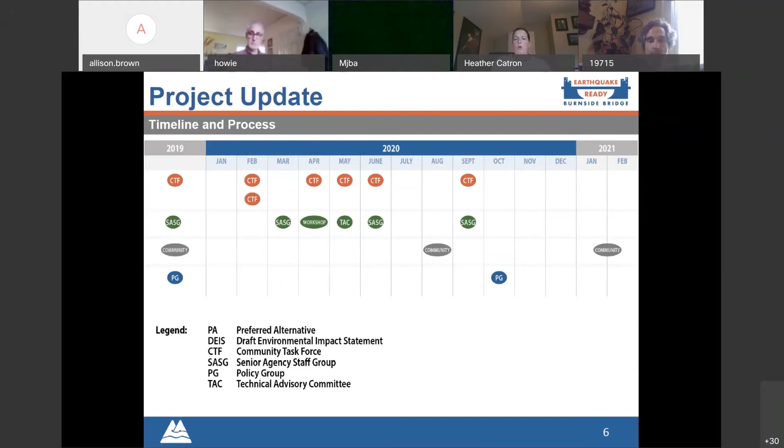I wanted to talk a little bit next about how we're using all of the information you've all been working on so hard over the past year and a half. We're taking the criteria and measures you've developed, plus the value weightings you assigned at your last two meetings.

And then taking those performance ratings that were developed by the technical team and vetted with the agencies, that's how we're actually going to start applying the scoring.

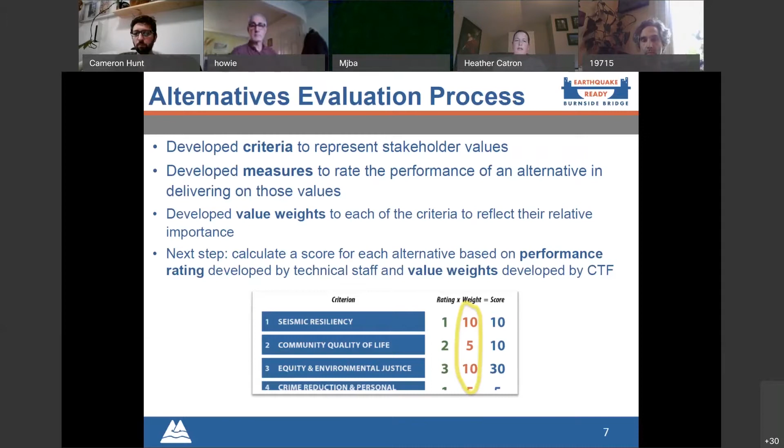Again, when we come back to you next month, that's where you'll start to see how the different alternatives actually scored against the criterion measures you've all identified, to help you make that recommendation around the preferred alternative.

So on the next slide, really what we want to talk about tonight, before we get into the results of the scoring, is highlighting some of the key differentiators. These will help make sense of why some things may be scored higher or lower for the criterion measures you've developed, to help get us through this process of selecting a preferred alternative.

So I'm going to pause there and see if there are any questions before I hand it off to Steve and Jeff, who will be walking through all of these key differentiators for our criteria.

So we're looking for any questions that folks have. Remember, you can raise your hand. Susan, I see your hand is raised, but I'm not sure if you have a question or if that's just left over from earlier.

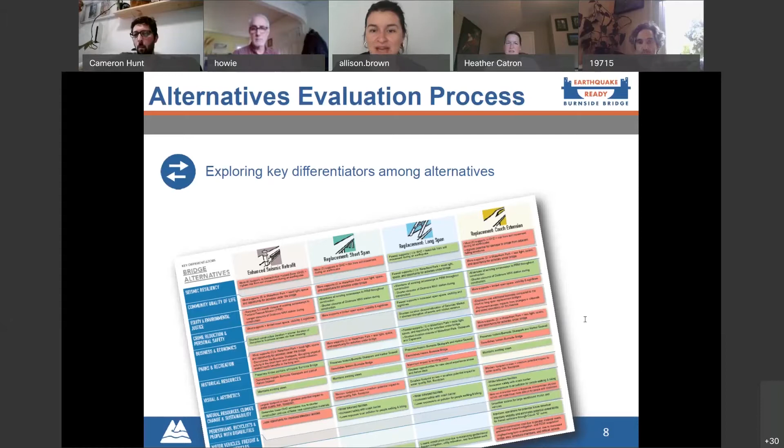Hi folks, so I will be talking about the alternatives, just kind of a reminder about what each of the alternatives are. I think last time we met we had 3, and now we have 4. So I want to talk a little bit about how that came to be.

Starting at the top, we have our enhanced seismic retrofit. As we've been talking about for months, that is the retrofit with a partial replacement, primarily over the freeway and the railroad spans, a whole bunch of deck replacement work, and frankly almost every part of the bridge is being seismically repaired one way or the other.

The middle two are now called replacement short span and replacement long span. That really stemmed off of the in-kind replacement we had, which means if you look straight down from an airplane, it effectively has the same plan view or aerial view extent to the bridge. The difference is really in the vertical elevation, and comes down to how long the bridge members are, the superstructure, from column to column.

In short span, it's very traditional, very similar to what's out there today. It's sort of conventional span lengths you would expect, girders that are below the bridge deck, the kind of bridge that's comparable to today. Now whether it's a lift bridge or a bascule bridge, that's up for consideration during the type selection phase, but really it's about the spans framing into it.

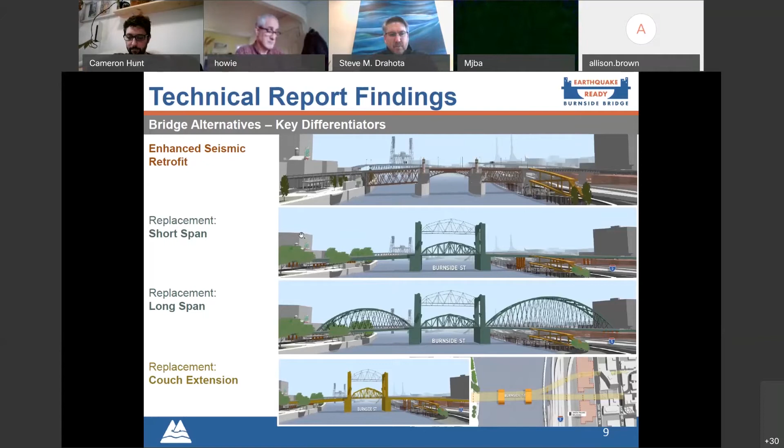Okay, next slide. So embedded into the questions for the alternative selection: A, what alternative? B, what should happen to traffic during construction? This is a reminder of those two fundamental options - a full bridge closure with detouring traffic to other sites, or building a temporary bridge to the south and maintaining at least one lane of traffic in either direction, plus bikes and peds during construction. Those are the key types of questions being examined, and we have lots of slides to talk about each - both the alternatives and the comparison against the criteria, and then these traffic options and their comparison against the various criteria.

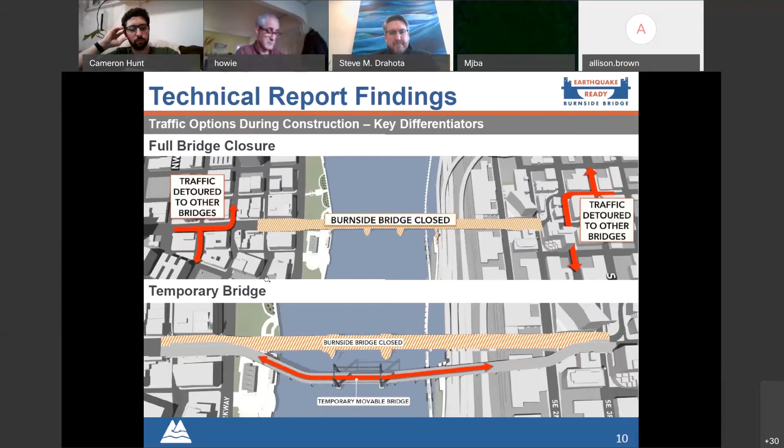So with that, we've developed a bunch of slides, and we're going to focus on the bridge alternatives first, and then the key differentiators within each of those criteria topics. Later on, when we're done with this section, we'll talk about that natural pause, and then discuss focusing on a temporary bridge or no temporary bridge, and go through a similar discussion and similar types of slides.

Next slide, please. So one of the things you all may have seen as you were looking at the materials in advance is this key for how to read the various slides we made. What we did is create this set of alternatives on the left, and each of the icons represents the 4 bridge alternatives: the retrofit, short span, long span, and couch extension, with green call-out boxes both in the slides and around the graphic itself to indicate some form of a positive differentiator, and a red box to indicate some form of a negative indicator. So we tried to create icons just to help understand whether it's a plus or a minus amongst all these slides for each of the different groups and topics.

What we're showing in this presentation is what we believe are the key differentiators. It doesn't mean it's everything about each of these, but what we felt is we extracted out some of those key differences that we found as we were studying those various topics, criteria, and measures relative to each other. So if there's no questions about this key, we can just jump right in.

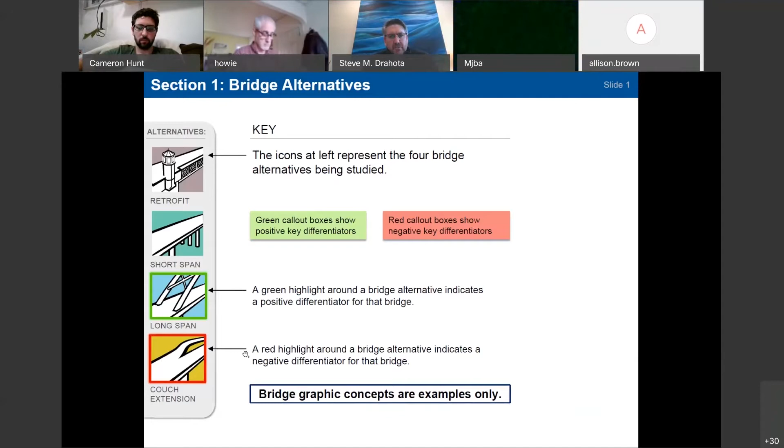So the first criteria group was about seismic resiliency. And what we found as we did our comparison is that there was a significant benefit that came with the long span compared to all other alternatives. This is really highlighted through the color coding you're seeing on the page. The long span, in what it naturally does in the top picture, is place the columns that are at the outer ends, or outside entirely, on the west side - this orangey color, which represents the liquefiable zone.

Compared to the alternatives shown at the bottom, where that same orange section has, for the short span, 4 sets of supports or columns shown on the east and 1 column set on the west. The retrofit has 8, and the Couch extension has 9 - that's because it splits off, so you have more foundations literally sitting in this geotechnical hazard zone. So there's a significant benefit that comes with avoiding that risk by spanning over it as much as you can, and only having 1 support in it.

If there's no questions, then we can move on to the next topic.

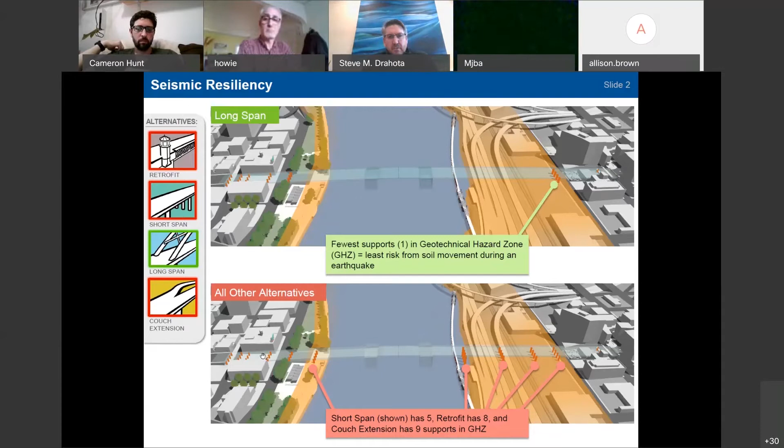And this is where we'll hand it over to Jeff for quite a few slides, and then I'll pick it up towards the end. Okay, thanks, Steve. Good to have everybody here. Cameron, especially good to have you back. Welcome back.

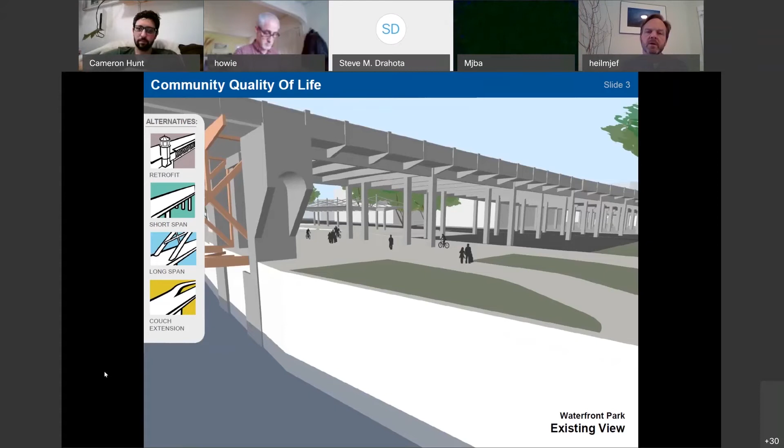So community quality of life, one of the key differentiators is between the number of piers and columns that you can see within the park underneath the bridge, especially in Waterfront Park. If you go to the next slide, this highlights in white all the columns for the bents that are within the Waterfront Park area and extending back through the Saturday Market area towards the Max station. The retrofit keeps all the columns that are there, but increases their size as part of the retrofit.

From a community quality of life standpoint, one of the things we looked at is community events and community facilities. This area is used pretty intensively for community events, Saturday Market in particular, but also other events. If you can go to the next slide.

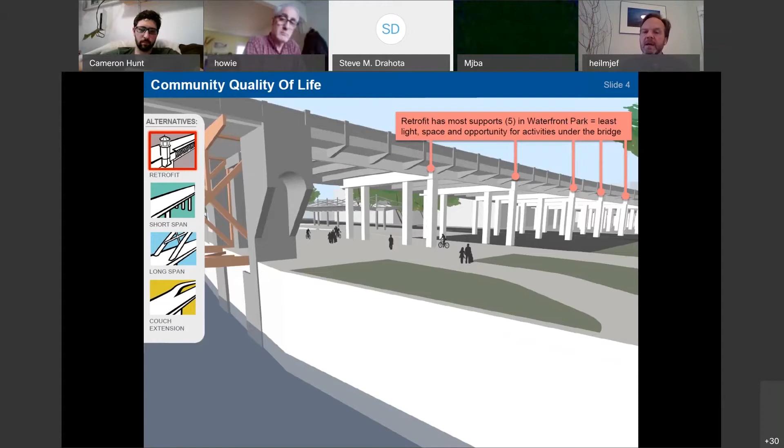Contrast that with the short span here. It has larger columns, but fewer of them. It gets rid of the one out on the harbor wall and gets rid of some to the west as well. So it has less total footprint underneath the bridge than the retrofit, but more than the final one, the long span. You can go to the next slide.

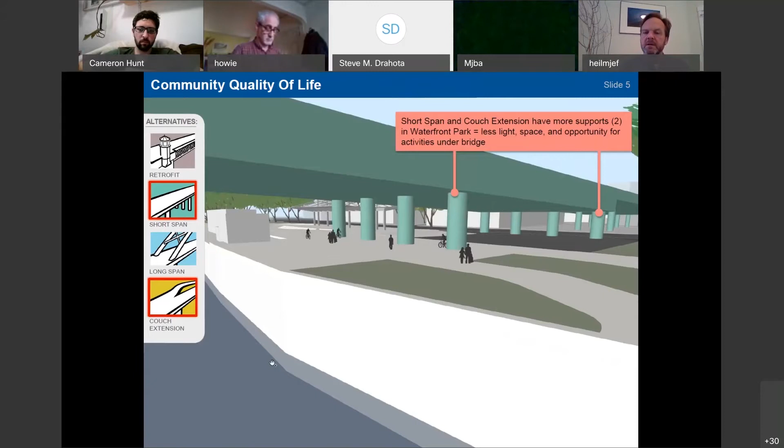Here you can see the columns eliminating a lot of the obstruction, providing more light. The deck structure itself up above is thinner as well, so that raises the vertical clearance a bit and makes it a little bit lighter and brighter in there.

One of the things you don't see on the slide is that the Couch alternative also had some disadvantages, in that it creates this new alignment that would point headlights towards residences, with a slight increase in noise levels in some locations. Next slide.

So equity and EJ. From a long-term standpoint, there weren't a lot of impacts identified for equity and EJ, but there is this short-term impact associated with the retrofit alternative, and that's at the west end of the bridge.

A retrofit would require up to 3 months closure of the important access, the primary client access into Portland Rescue Mission. With the replacement bridges, short span, long span, and Couch, all are able to avoid that because they're replacement bridges. The abutment can be moved out, and those access points can remain open throughout construction. But it's up to a 3-month closure, somewhere between 2 and 3 months, with the retrofit. That's a pretty big disadvantage of the retrofit alternative.

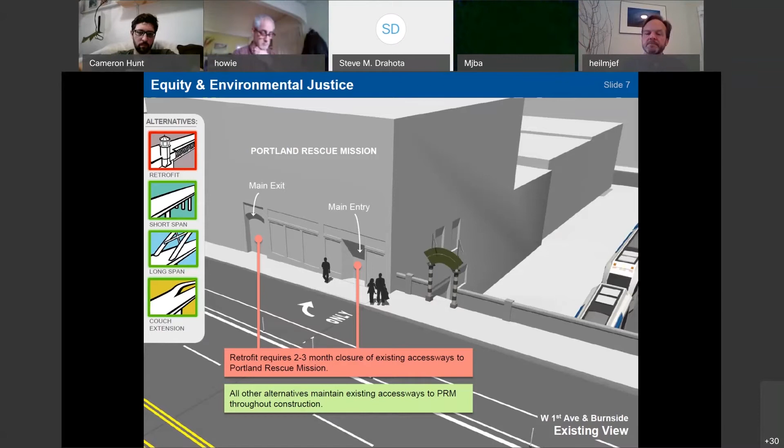Next slide. So crime reduction and personal safety. This one you're going to hear about a fair amount in terms of what the actual factor is that's affecting crime reduction and personal safety.

It's similar to the community quality of life factor, the idea of removing more of these columns and piers underneath the bridge. In this case, you see Naito Parkway looking towards Waterfront Park, and the columns obstruct sight lines somewhat. They create niches where it's harder to provide that CPTED principle, crime prevention through environmental design, now referred to as natural surveillance, where you have better sight lines, more people actively moving through, and can keep an unofficial view of where people are and what's happening around you. So that's the primary effect there, and it's actually a benefit.

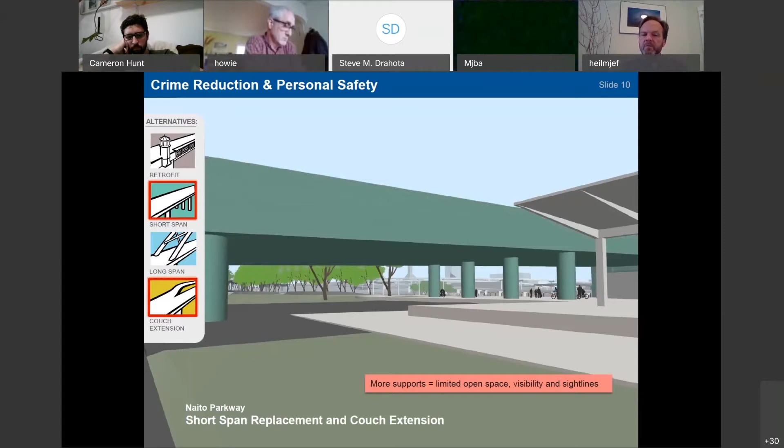And then the final slide, the long span. There you see that entire area from right about the sidewalk on the east side of Naito all the way out to the shoreline, all the way out to the harbor wall, would be open with the long span alternative. So it provides the greatest benefit from a crime reduction and personal safety standpoint. Next slide.

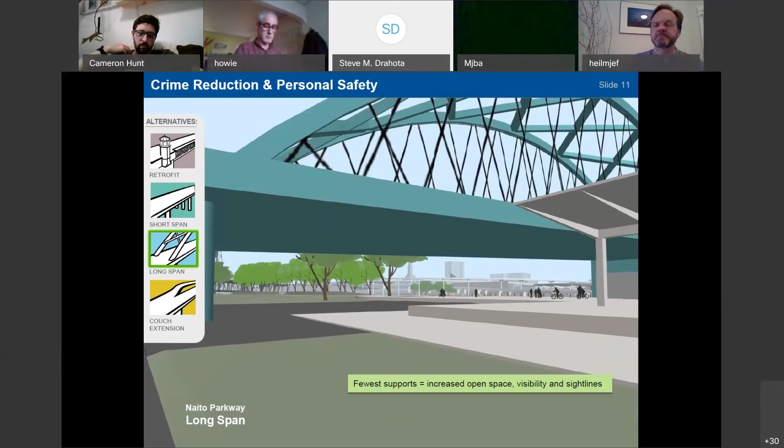Okay, so there are a number of factors here for business and economics, and some of these balance each other out or contradict each other to a certain extent. The idea of access to businesses was one of the things we looked at, how the different alternatives affect business access during construction in particular. The retrofit, without a temporary bridge, has the shortest overall construction duration, so there's a benefit in that the total length of time during which access to businesses relying on crossing the river is limited is shorter, because construction is just shorter.

The short span's advantage is that it has less business displacement. Actually, all the alternatives except the Couch have less displacement. The Couch has the most business displacement, which is a later slide. The retrofit and the replacement bridges, except the Couch, have the least amount of business displacement. The Couch only displaces one additional business, but it's a fairly good sized one.

A long span, compared to the short span, would minimize the duration of closure for some areas that bring people down to this area, that frequent businesses, providing more activity for businesses, particularly the Saturday market. So there's a shorter duration of the Saturday market closure.

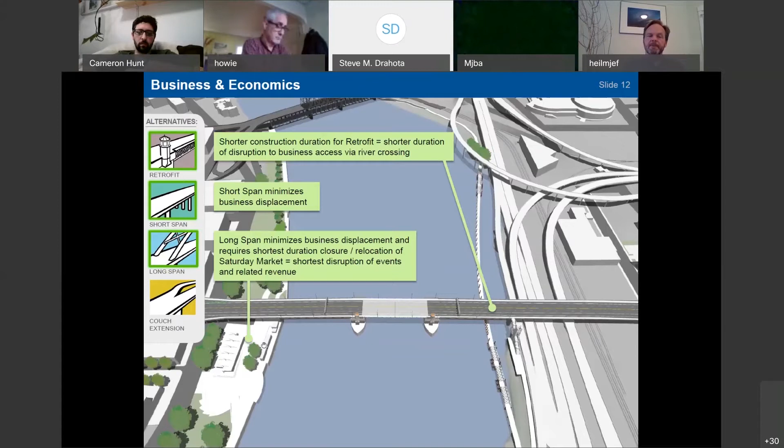And here's what I was mentioning about the Couch extension. It adds one additional Pacific Fruit Company business displacement. It also has some long-term impacts where you have to lower 3rd Avenue, where the new Couch extension would go over the top. That changes your ability to access the level of the sidewalk compared to the street, and complicates some access points to different businesses. So that's a bit of a con for the Couch extension.

Parks and Recreation - a number of items here. As I mentioned before, the long span, compared to all the other alternatives, has fewer columns underneath, which shows up as a benefit in a number of areas, and Parks and Recreation is another one. We already talked about the benefit to Waterfront Park - a benefit to the park itself, as well as to crime prevention and safety, as mentioned earlier.

Another fairly big benefit is it would have the shortest duration of closures for three key park or recreation facilities. One being Waterfront Park itself - this area wouldn't be closed as long. Also for the skate park - while it's not an official or formal park, and certainly not a city-managed park, it's nevertheless an important recreational facility. The temporary closure associated with the long span would be shorter duration than with all the other alternatives. And then, of course, the Esplanade, another important recreation facility, would have the shortest duration closure as well.

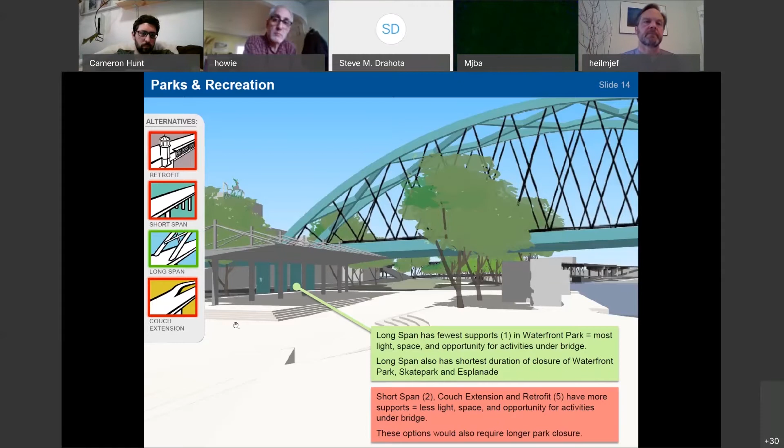So the skate park - in addition to what I mentioned earlier about duration of closure, there are two different impacts happening to the skate park. One is that just construction activity itself, from a safety standpoint, requires the skate park to be closed for a certain amount of time, and that varies between alternatives, as mentioned before.

The other impact is a physical one from some alternatives. The retrofit alternative, because there's an existing bent and columns right within the skate park itself, would actually require demolition of the skate park to retrofit that bent. It would permanently convert a portion of that space currently used as a skate park into the bridge substructure. None of the other permanent alternatives have that physical impact - the temporary bridge does, but we'll talk about that later.

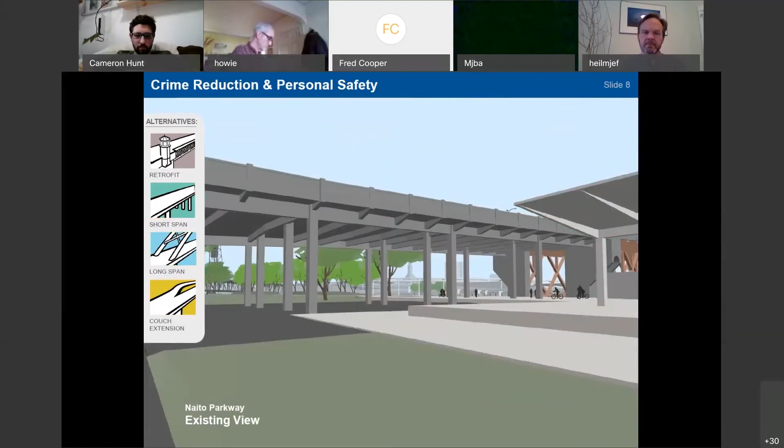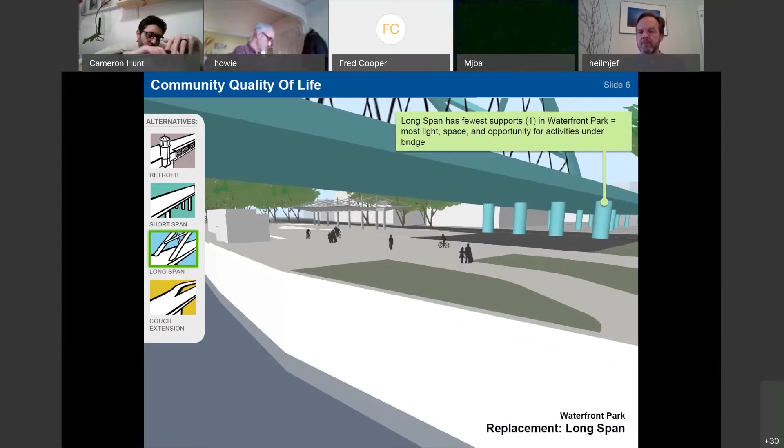Yeah, if we can go back a little bit - I was looking at the presentation graphics on community quality of life, and one of the indicators was less, more, light. But looking at these, there's no way I can tell how that was accomplished, and the surfacing is just kind of paving, grass, or whatever. Can you actually highlight shadows to show that differential? I look at that one, and then I look at the Parks and Recreation on the West Bank, and I see nicely shown shadows of a canopy, a pavilion, of trees - shadows show up there very nicely. I thought maybe they could be enhanced in these other slides to show that particular feature. Good point, Fred - I'm sure that can be done.

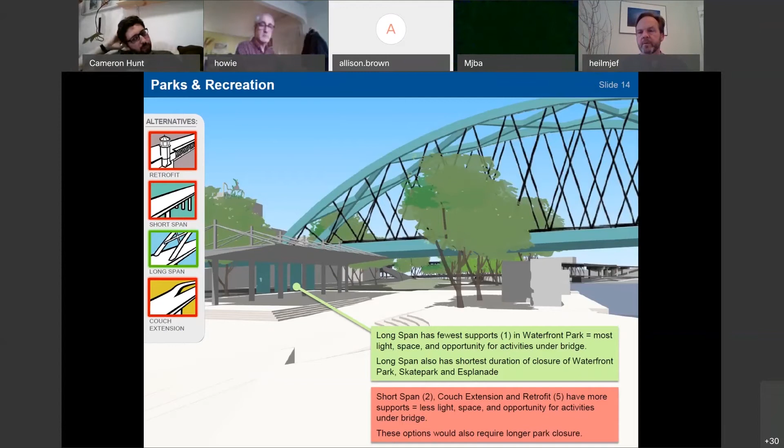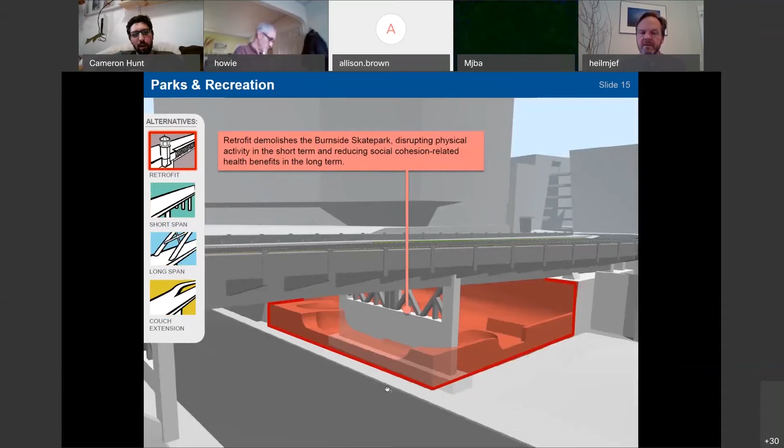I was just looking at some of these skate park photos, and I know I've been to that skate park a few times. Some of those support columns for the bridge itself are actually part of the skate park. So as part of the short span, long span, or retrofit alternatives, would those have to be cut out? Or could part of them remain so they don't have to redo all of that area around the support structure? I know how the retrofit slide affects the skate park, but with the other alternatives, would those support structures have to be removed or adapted in some way to facilitate the skate park better?

Yeah, good question. I'm actually going to let Steve answer that one. He's given it a lot of thought.

So for the replacement alternatives, as long as there's a gap from the replacement bridge to the top of the existing column, they can be left in, as much as, frankly, the skate park might want it to be left in. There's no requirement to take it out. It can be brought all the way down and shaved smooth, or it can be left in as a feature, so long as there's enough of a gap between the new bridge and the existing element for maintenance and so it doesn't affect bridge operations. That's entirely up to a future design consideration.

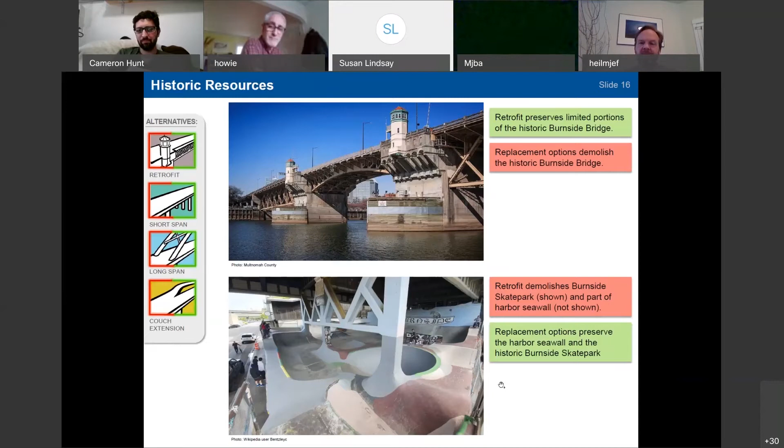That doesn't mean the two resources are equal. We aren't making a judgment about that. All right, looks like we don't have any other hands.

So Jeff, back over to you. Okay, so the visual and aesthetics, if you recall, we had three criteria there, and the first one addresses all about existing views and how the different bridge alternatives affect existing views and view corridors. Obviously, the more the bridge looks like the same profile, especially the vertical profile, as the existing bridge, the less effect it's going to have on views. So retrofit would have the least, short span and couch extension, because they are considered kind of in-kind alternatives and have a similar vertical physical presence to the retrofit. They would also have the least impact on existing views.

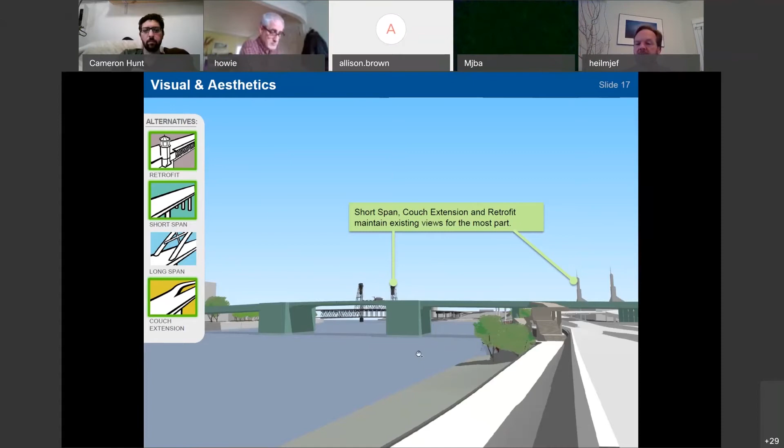Whereas the long span, by having above-deck structure, is going to have the largest potential impact on existing views, because all that structure is above the deck. You can do the next slide. The next part, actually, I'm sorry, the next one after this. The other aspect, we recall the criteria visual aesthetics was, oh sorry, go back again. It's not there. I'll just talk about it.

The other visual criteria that you all adopted had to do with potential for creating new visual experiences. In that regard, the long span was considered to have the greatest advantage in terms of more opportunities for iconic structures that could be seen from farther away, for opening the area underneath for additional visual and light experiences, probably greater potential for gateway experiences, things like that. So there's the trade-off: long span has the con in terms of the largest impact to existing views, which could be adverse, but also has the pro in terms of it creates the most opportunity because it would be the most different from the existing bridge for new visual experiences.

The next slide. And natural resources, there were a number of things associated with that. Actually, I had a question.

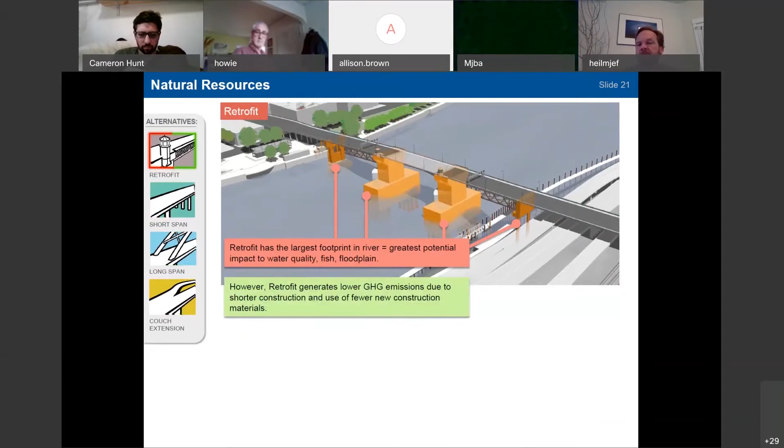Great, back to you Jeff. Okay, I think that was the last slide on natural resources. If there aren't any questions, then it's on to Steve.

Next slide. In addition to that, there's a hard barrier placed the full extent of the bridge that separates vehicles from bikes and peds, which increases safety. Because of the offset enabled through that additional 8 feet, you're further away from the exhaust and emissions of vehicles compared to the retrofit, where you're tucked up against the inside lane of traffic.

The one downside for the Couch extension is the whole nature of the Couch extension and the way the Ankeny Bikeway and some sidewalks frame in underneath. You're no longer able to utilize the pedestrian bikeway plaza that runs up from 3rd into the Couch area, so you have to extend and wrap around onto Davis to get onto the westbound direction. So there's some disincentive because of the connectivity to Eastbank Esplanade and that change to your access onto the Couch extension.

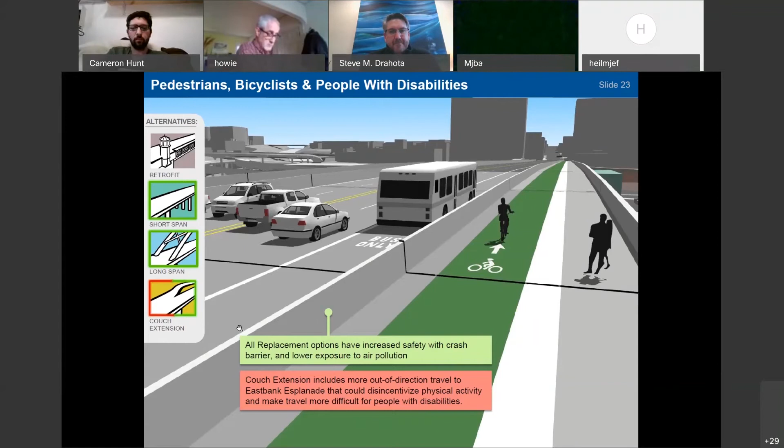And Steve, we have a question from Susan regarding some of the last slides. I'm going to pause for a second, she wanted to make a comment. Go ahead, Susan. Yeah, unfortunately I just unmuted right when the dog started barking, but these things happen.

I have some concerns about the aesthetics of the new option, because we rated aesthetics and views not very high compared to other things. I was trying to find out from whoever designed the one with those tall risers, if you'd done any field work around the site, because we didn't know about this option until now. Had you done any kind of focus group, or what had you done around that design? Because visually, many people might see it as kind of impairing, especially with a north-south view.

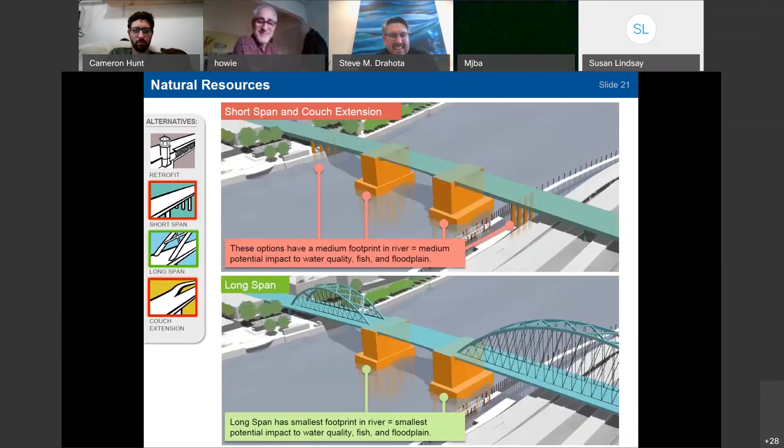Sure, so if we can go back to a couple of slides that highlight this, I did raise my hand during all this but I just didn't get called on. That was the problem. There we go. There, perfect.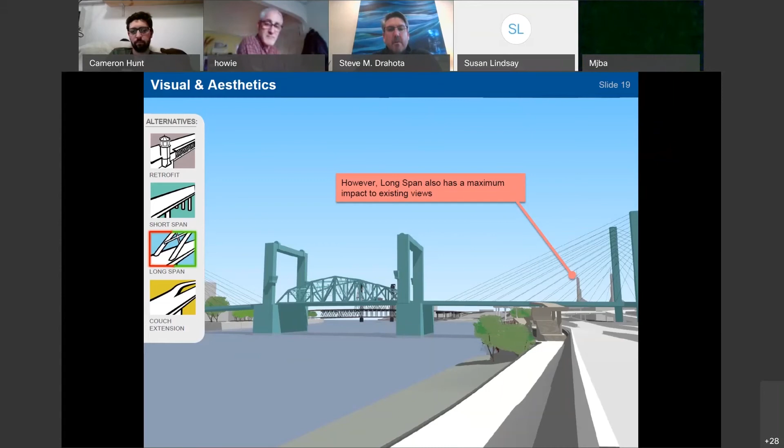So admittedly, we have not done very much whatsoever with refining a design for this lift option, so what you're seeing is pretty crude and blocky, and in part it's because there hasn't been a lot of effort gone into it. Is that Steve? No, sorry, I don't mean the lift, I'm talking about the long span, the supports, the suspension supports, or whatever they are. Those, that's what I'm talking about, not so much the lift.

Got it. The good news is everything I just said is still true even for this. The way we approached it was a high-level general sizing based on a certain span length. You go up a certain height, and with that height, you may have to have some cross bracing. So we haven't done a whole lot of refinement to get to something more elegant. We wanted something representative and a close approximation. Should this be selected, certainly that's where the conversation goes, both in terms of how you make the sizing feel possibly lighter, subject to the urban design conversation, but also a different way to frame it and make the piers look right. A lot more work would go into a type selection study should this alternative be selected. We didn't have much conversation with anyone from an aesthetics or urban design standpoint; we were trying to minimize an aesthetic feel and figure out the qualities and attributes of a longer span. More to come there if it's selected.

All right, thank you.

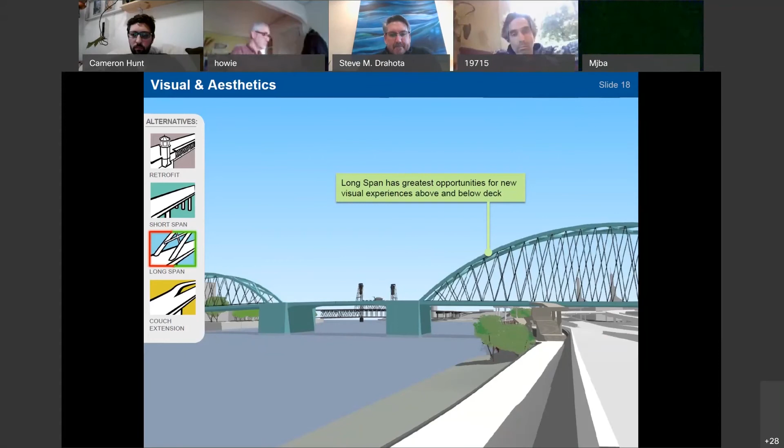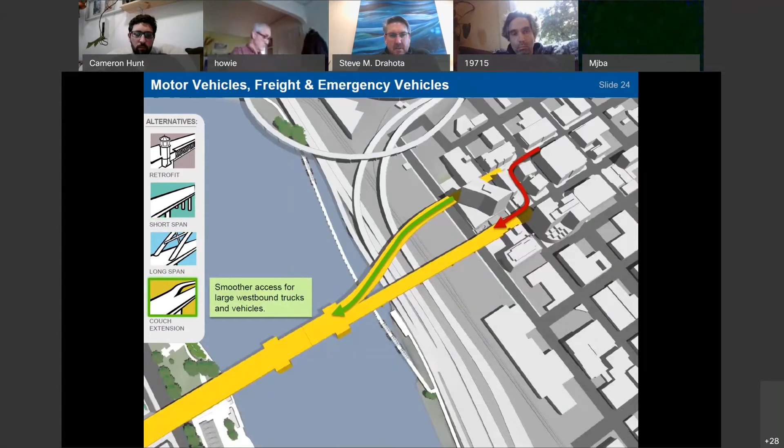Okay, if there are no other questions on this one, we can go to the next slide, which looks virtually the same. I don't know if you could tell the slide even changed, but this is for transit, and it really has the same type of benefits. By having a more gradual curve, it can improve operations, meaning speed through this area. Granted, it's only a small segment of the entire corridor, but you can improve at least speed through the S-curve.

And it does, because you're avoiding putting the future streetcar through the S-curve. You can avoid some potential collisions of it or buses relative to other vehicles. Granted, there have been crashes to date with vehicles going through the S-curve in the last 7 years or so, but we understand that's a byproduct of an S-curve over a short period of time. Having a more gradual curvature and alignment would improve and eliminate this potential sideswipe possibility if you keep the S-curve.

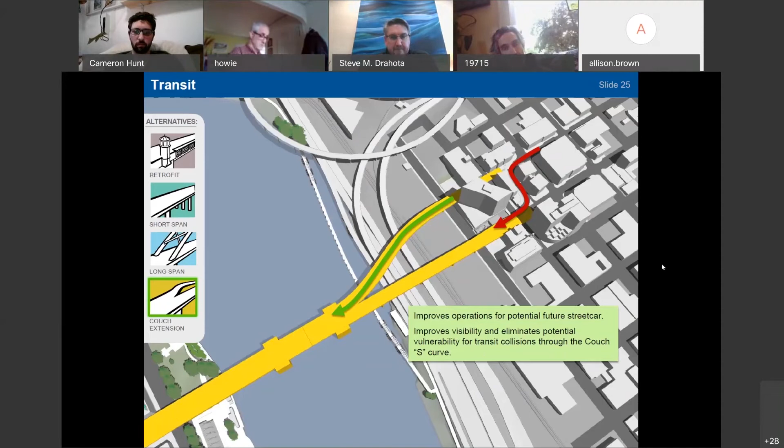All right, so the next slides are about fiscal responsibility, which really gets into cost. And the way these slides are set up, we're going to work from left to right, or from the retrofit option to the Couch extension. So the first one, the retrofit option, we thought when we first started all of this that this was going to be the low cost option.

In fact, it's not. The two types of replacement are generally cheaper than the enhanced seismic retrofit. The numbers shown here are the overall construction cost, and the shading represents the additional cost should there be some form of temporary bridge, in this case the full temporary bridge, which is about $90 million. So the bottom number, 895, is the cost if you're detouring all traffic, and the upper cost, 985, is the cost if you're maintaining traffic on site, one lane each direction with a temporary bridge.

So this one came out to be, frankly, the second highest cost, and has the largest maintenance cost over time. That makes sense because you're trying to preserve a 95-year-old bridge for another 100 years, and so embedded into it is a lot of cost to maintain the enhanced seismic retrofit.

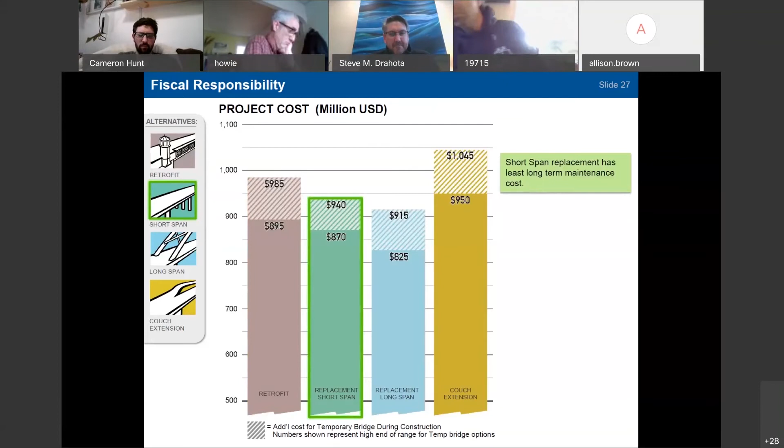The next alternative is the replacement short span, which is a little cheaper than the retrofit, and it has the least long-term maintenance costs. In part, it's just because the amount of materials to maintain are slightly smaller and slightly less technologically advanced, which is what we'd be talking about in terms of the replacement long span.

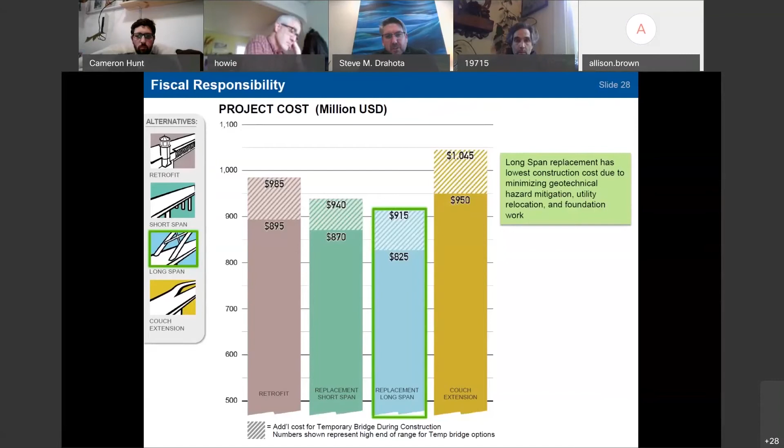So it's the second cheapest alternative. Only the long span replacement, next slide, is cheaper. This long span is cheaper in large part because you've eliminated the need to do so much in-ground geotechnical mitigation work. You avoided some utility relocation work. You've avoided some other risks that come with it.

Now, you're trading a lot of the below-ground cost for building more superstructure above, and usually there's a question of does it end up costing more overall? And the answer in this case was no, because that geotechnical hazard mitigation and the risks that come with it are so great that it became the least expensive alternative of the four.

And the Couch extension itself is the most expensive, and it shouldn't be that much of a surprise. You have more bridge than any of the others. You have more foundations in the geotechnical hazard zones than anything else, and therefore you have to pay for all of the mitigation that goes with it.

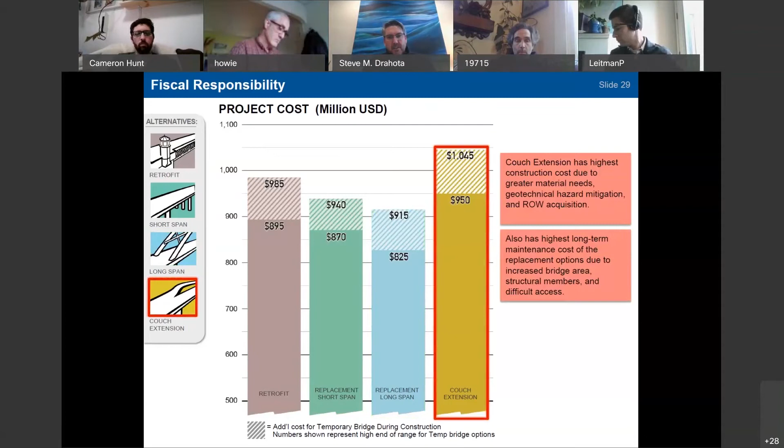You also have so many members that the long-term maintenance cost is pretty high. It's the highest of all the replacement options, still less in general than the retrofit, but the highest of all the replacement options. So with that, I'll pause because I think I see some questions that might be coming up.

And we'll move on to the next slide.

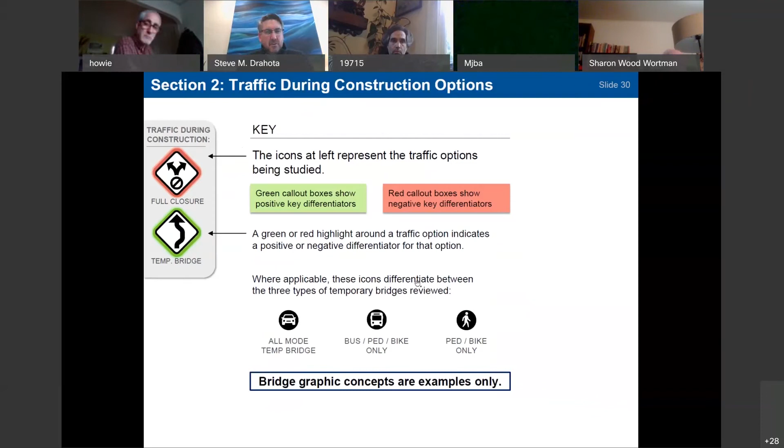And you'll see a lot of this flavor of a dependency on time that comes with a temporary bridge built into many of these. So with that, I'll hand it over to Jeff, and he'll keep rolling for a number of slides.

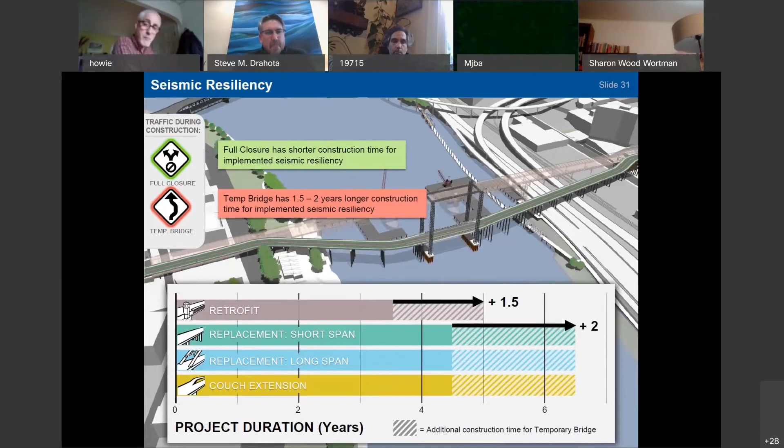Okay, thanks, Steve. And Allison, when you see a hand up, just feel free to pause me whenever you see a question. I will, thank you.

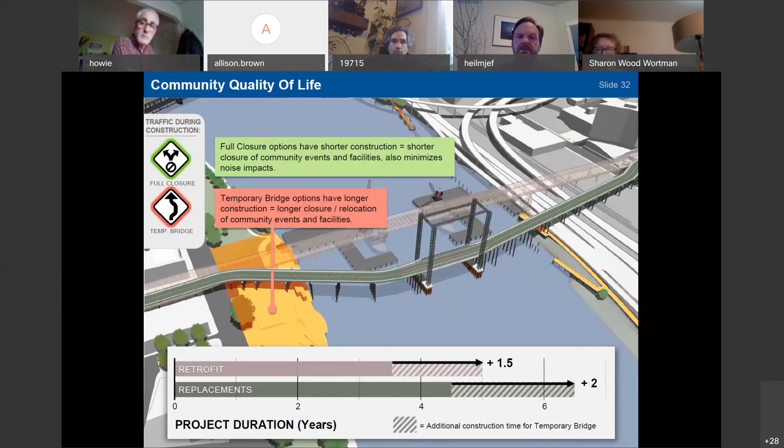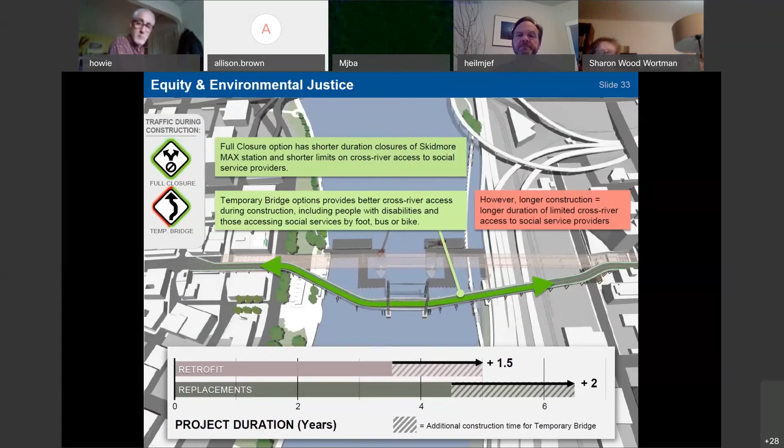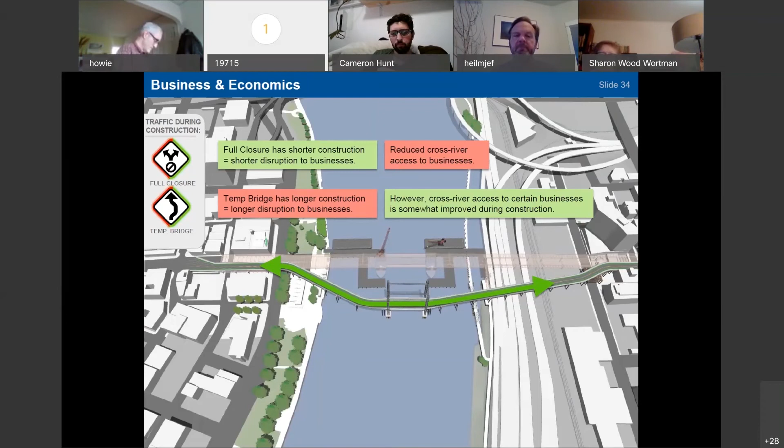Thank you - thanks for bringing that up. All right, back over to you, Jeff.

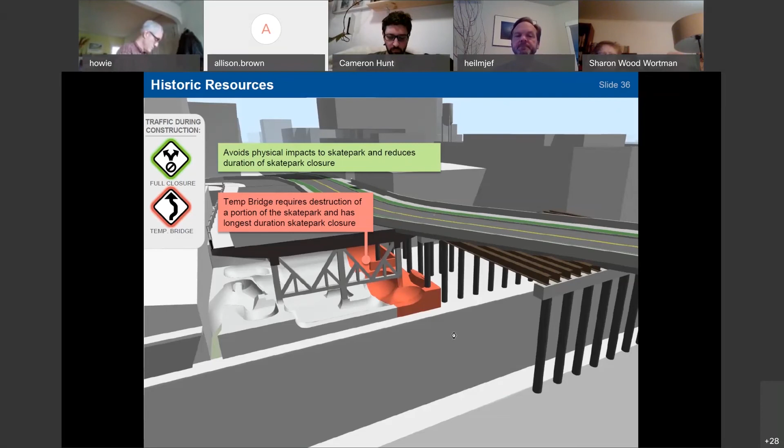One other factor is that this didn't rise to the level of being an adverse effect in terms of the federal regulatory process for reviewing impacts to historic resources, but it was pointed out that the temporary bridge adds additional clutter during construction and increases the duration of construction by 1.5 years. I want to point out that construction as a whole is not considered a significant impact on the historic context of the area. So the temporary bridge does add some impact, but it's not considered significant from a temporary standpoint.

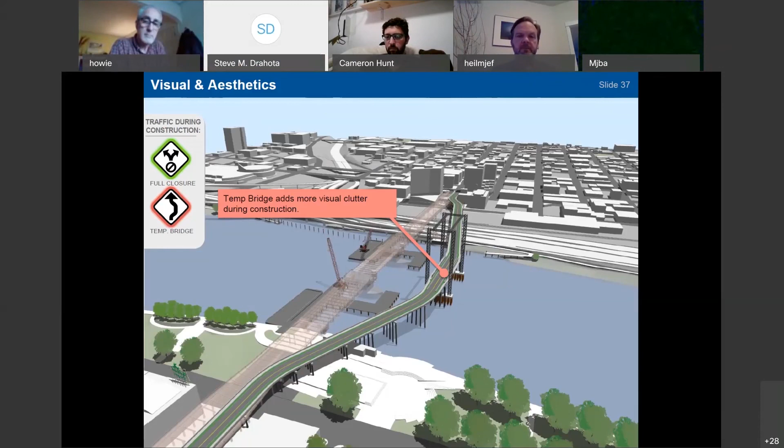Yeah, that does have to get removed. The plan is it would be deconstructed, not demolished—removed, stored, and installed back in place. I'll let Steve answer, but I believe that is included in the total construction duration. That's correct, that's correct. Okay, great, well with that I think we'll keep moving.

I think I have the last of my slides, I believe. Yeah, on to Steve. Yep.

So the next few slides are different ways to compare pedestrian and bicycle travel time delays between the different alternatives with or without a temporary bridge. The takeaway is with full closure, there's an additional 5 to 12 minutes for bikes and an additional 10 to 18-minute delay for pedestrians to cross. Because of time, I'll just walk through each slide and we can ask questions about each one.

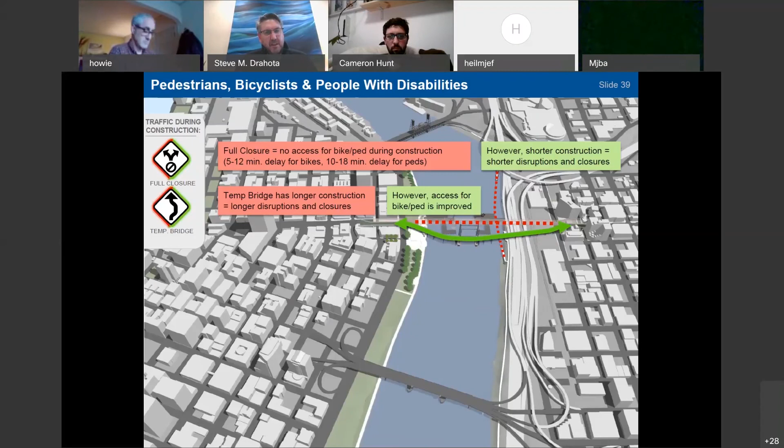Next slide is for motor vehicles. Going back to the question, having a temporary bridge still has congestion—having a single lane of traffic doesn't give you the same capacity that exists out there today. So we capture the difference in travel time depending on the different routes you might take up or down river of the bridge. What we found through our analysis is that a full closure only adds an additional 2 to 4 minutes of travel time delay for vehicles compared to having the temporary bridge. In some cases that's on the lower end because you're not in congested areas, and further north you get to about 4 minutes of additional travel time without a temporary bridge. That was a significant finding through our traffic analysis.

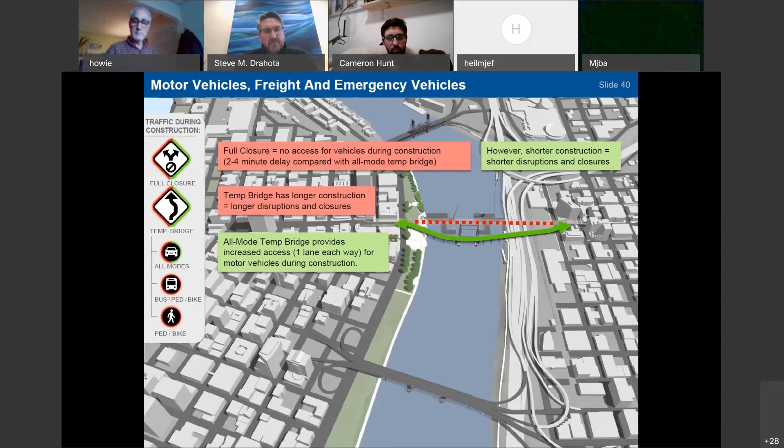Next slide, for transit—this one depends on what your temporary bridge is. For a temporary bridge that's multimodal, you still have congestion, and buses have to go up to the next bridge to the north, adding about a 5 minute delay without a temporary bridge. If you had a bus-only temporary bridge, you'd actually gain time—better service than even the existing bridge, just because it's a bus-only structure. That's how the results came out for transit, and with bike-ped it's the same for buses as not having a temporary bridge at all, so you'd have that additional 5 minute detour.

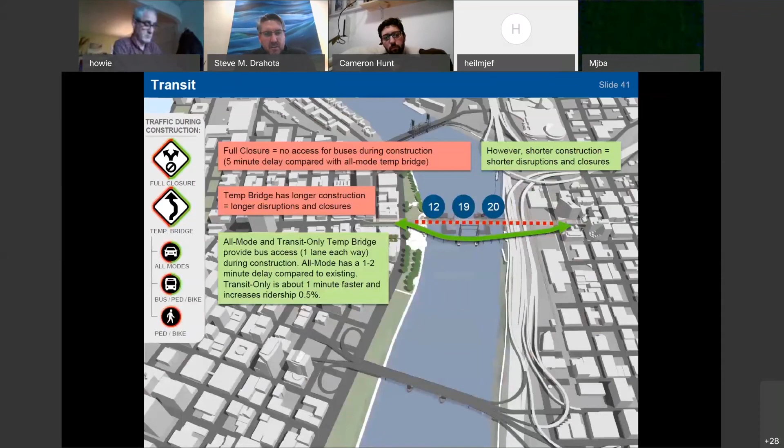And so those 3 slides are the basic takeaway on travel time delay comparisons. If there's no questions on that, I can move to cost. I don't see any hands at the moment, so we'll keep it moving.

So basically, this is the same information I presented before. The temporary bridge adds about $90 million for the full width option, whether it's general purpose lanes or bus only lanes. The bike ped only option is a $60 million add. So those are the costs that come with each of those types.

And with that, I think we are at the end of all of the differentiating slides. So folks, I'm not seeing any hands raised, but this is kind of our opportunity. We are closing in at the end of our meeting. We have 7 minutes left, but if you do have questions, oh, Cameron, there's a hand. I knew that there would be one. Over to you.

Yeah, sorry to ask this a long time ago. On the business aspect of the different options, was there any sort of difference in terms of river traffic navigation, in terms of how long or how often the navigable path would be closed for river traffic with the different options?

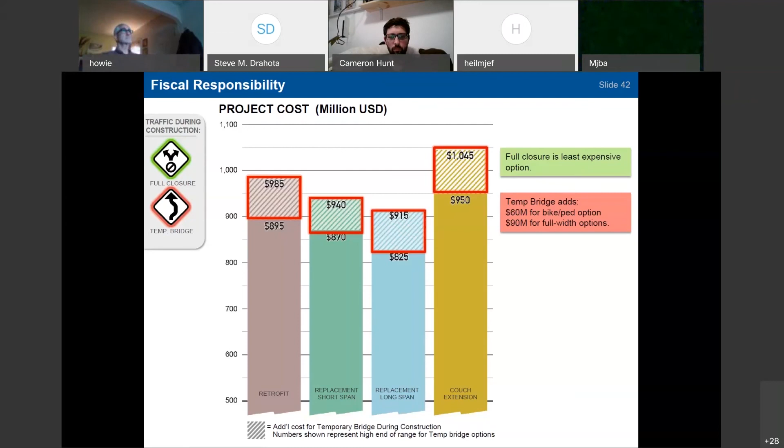All right, I am not seeing any other hands raised. Was that somebody trying to chime in?

Okay, so I think this is back over to Heather to talk a little bit about our upcoming next steps. Heather, over to you.

Hi, everyone. Yeah, so again, we kind of talked about this at the beginning of the meeting, but at our next meeting, we'll be discussing the results of the alternative evaluation and getting to a recommended PA. If we need to, we'll continue into June with that conversation, and then again, taking that back to our agencies, the public. We do come back to you in September, even though it's not shown on here, with the results from our outreach, and then our policy group, where you will be making the final recommendation around a PA to take out into our draft EIS. So I think that's what we had for next steps, Allison.

Great. Any final questions from folks? This is our first meeting. Oh, we do have a question from Bill. Go right ahead. Bill, are you there? We can't see you. Oh, there we go. Go ahead, Bill. Yeah, sorry.

Art mentioned that the long span bridge, the arch on the east side, is very large in proportion to the rest of the bridge. Steve, would it be possible to offset the height of that arch? You'd be putting a pier right in the middle of that geohazard zone, but two arches instead of one would minimize the height of that. Is that a possibility, or?